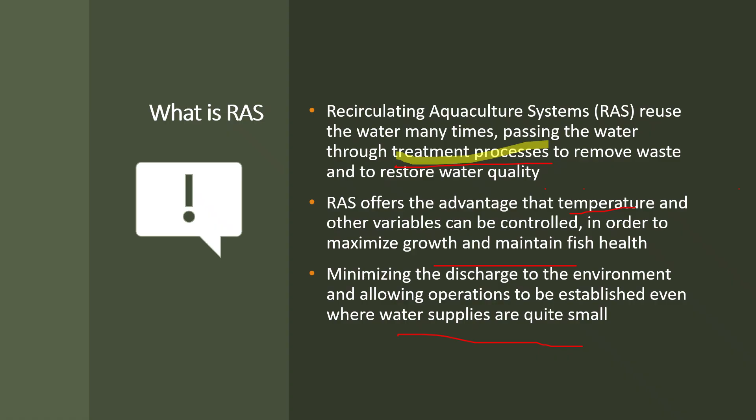We have different degrees of this water circulation. Sometimes we are getting 100% of water through the pump, sometimes less percentages. It highly depends on our activities, our scale, and other factors.

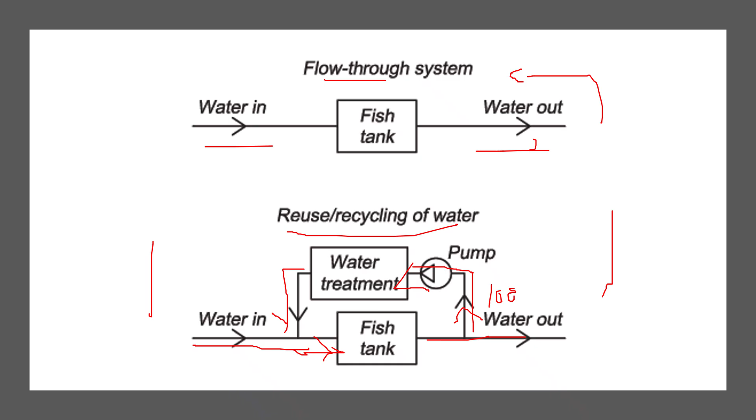So reuse, recycling, or water recirculation - this is the simplest process. We take water from the inlet and it goes through the outlet. While going through the outlet, we pump water again to the water treatment plants, and it comes to the water inlet again. These are the basic steps in this water recirculation aquaculture system, or reusing aquaculture system. This diagram shows the simplified process flow of how this recirculation aquaculture system works.

This is an organized set of complementary processes that allow at least a portion of the water leaving - sometimes not 100% coming to the tank. So a portion of the water is leaving from the tank, and just a portion of the water is coming through the pumps and filtration.

Water goes from the fish culture tank to be reconditioned and then reused, in the same fish culture tanks or other ones. Usually in our farms there is not only one tank or pond - there's a culture system with a number of ponds. Sometimes water goes out from one tank and comes to another tank through the filtration process, so it goes to the same fish culture tank or other fish culture tanks. Don't get the idea that it always comes back to the same tank again.

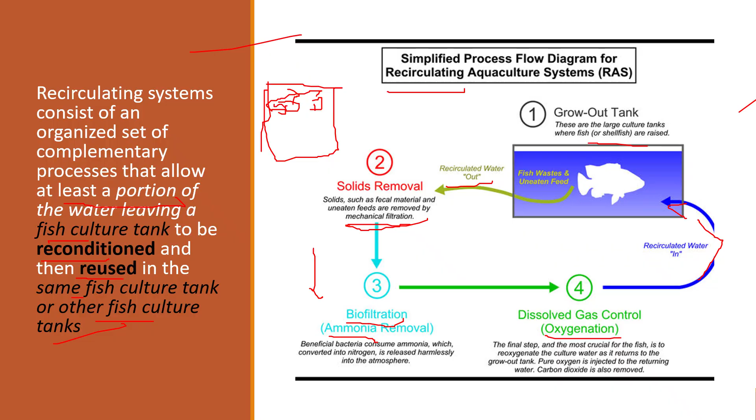Okay, so in a recirculation aquaculture system it is necessary to treat the water continuously. Because if the water is removed from the tank continuously, then we need to treat the water continuously to remove the waste products excreted by the fish and add oxygen to keep the fish alive.

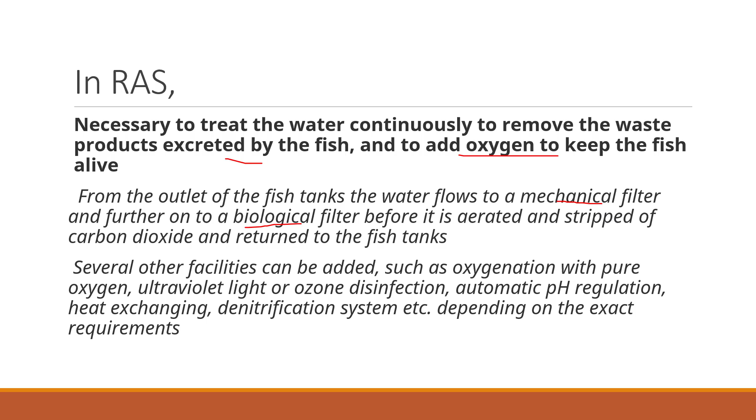So from the outlet of the fish tanks, the water flows to the mechanical filters as we discussed earlier, and further it goes to the biological filters, and before it is returned to the fish tank it is aerated and stripped of carbon dioxide. So several other facilities can be added. These are the basic steps, right?

So we can add several other facilities, such as oxygenation with pure oxygen as we discussed in the previous diagram, or UV lights, ozone disinfection, automatic pH regulation, heat exchanging and denitrification systems. This highly depends on the exact requirement and the scale of our tanks, the quality of the water in the outlet and the quality of the water we need in the inlets.

So now you have a good idea about what recirculation aquaculture systems are and what the components of these systems are, right? Okay, so this is a very good method. You can see sustainability is there. Water is recirculated through the filters and we are reusing the water.

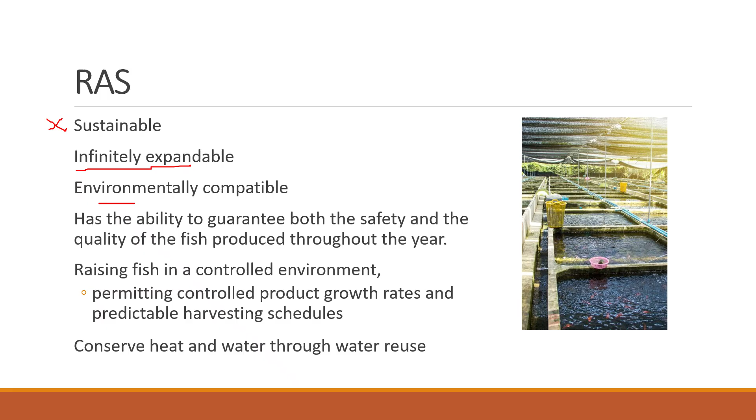Infinite expandability is there. With the improvement of our filtration system, we can expand the system, and this is an environmentally compatible system. It has the ability to guarantee both the safety and the quality of the fish produced throughout the year, if we have the water throughout the year,

because water is recirculated in this system. And also raising fish in a controlled environment permits controlled growth rates and a predictable harvesting schedule. So as we discussed in the previous point, throughout the year we can do these kinds of activities, raising fish in a controlled environment.

This environment is controlled because we are controlling the water quality parameters, so the growth rates and predictable harvesting can be scheduled. It conserves heat and water through water reuse, not like in flow-through systems. So in here we are reusing the water.

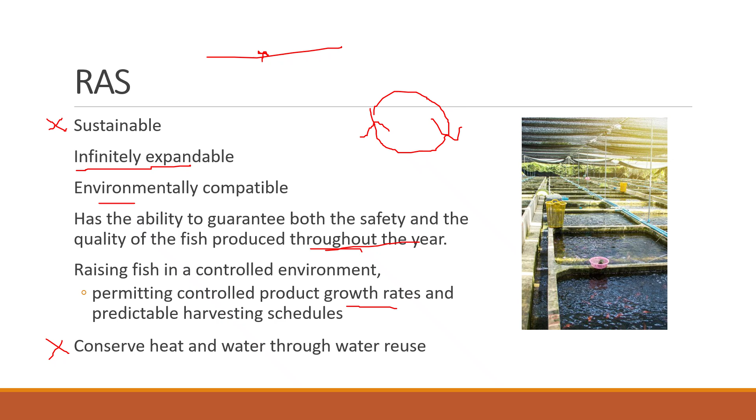Okay, let's move on with the slides. Water treatment processes are used to change the characteristics of water passed through the process, right? Sometimes a water treatment process can change more than one characteristic of the water. For example, water flowing through a trickling biofilter can gain dissolved oxygen and nitrate, while dissolved carbon dioxide and

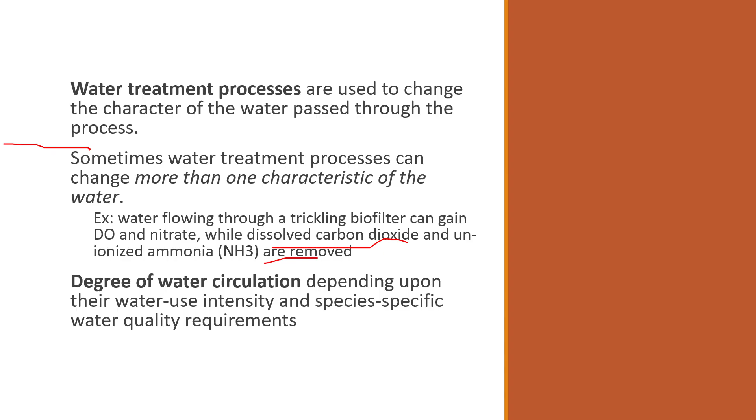un-ionized ammonia are removed. So the degree of water recirculation is the main thing by which we divide how this water recirculation happens in the recirculation system. Reusing, we can say the degree of water circulation, right? It depends upon the water use intensity and species-specific water quality requirements. So basically we are talking about what portion of water is taken to recirculation, by these degrees of water recirculation.

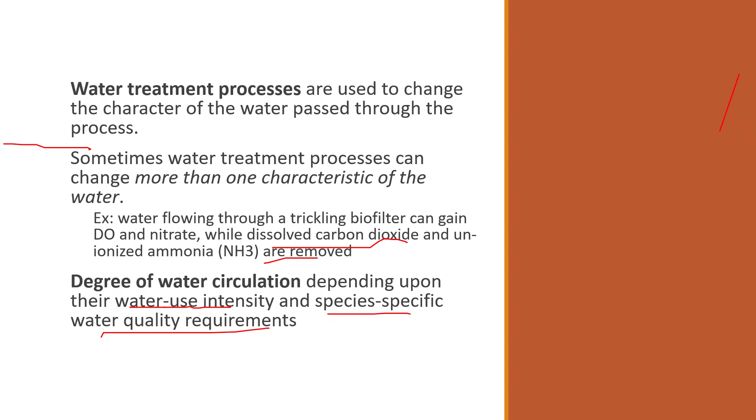Okay, so we are going for this degree of recirculation. This is actually the calculation of the degree. The simple idea is which portion goes through the filtration after the outlet. Not 100%, sometimes a certain percentage goes. So we are using this degree of recirculation to describe the reuse. To describe the reuse or recycling system, several parameters are required. Degree of reuse is one parameter. It gives the percentage of the new incoming water in relation to the total amount of water.

So in this system, as we talked earlier, water comes in, water goes out. When water goes out, some amount of water comes again through this filtration system and comes to the inlet, right? Some amount of water is released, so we need to fill that gap by inputting some percentage of water. That percentage is the new incoming water, Qn, in relation to the total amount of water flowing into the fish tank. So in the degree of reuse we calculate new incoming water as a percentage of the total water going through the fish tank. Okay, I think you got the point, right?

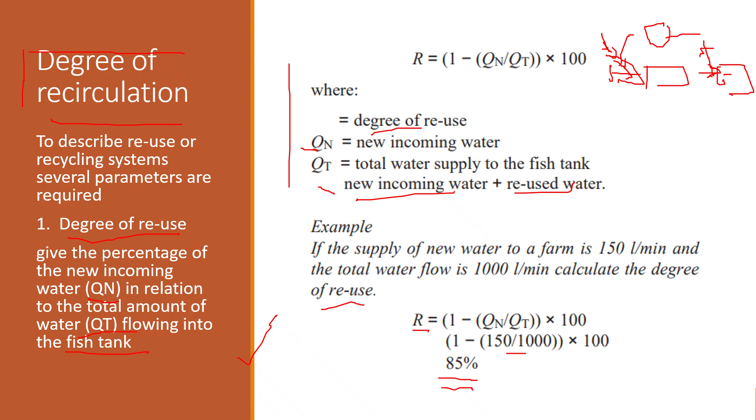But the degree of reuse does not give enough information about the performance of the system. It's not sufficient to describe the recirculation aquaculture system properly. Here we are talking only about water input, which amount of water comes into the system or goes out of the system. But we are not getting the idea of how much new water is added per kilogram of fish, based on the amount of species in our system, meaning the number of kilograms. If we can say for a kilogram of fish this number of liters is input or reused through our system, that will give a proper idea about our recirculation aquaculture system.

So the degree of reuse also gives a good idea. But if you can tell, per kilogram of species, how much water comes through the system and is used, that will give you more understanding about our recirculation aquaculture system, right? Okay, so then we move to the second way of describing our recirculation aquaculture system: the degree of purification. That is, how effectively the cleaning plant in the reuse circuit removes unwanted substances.

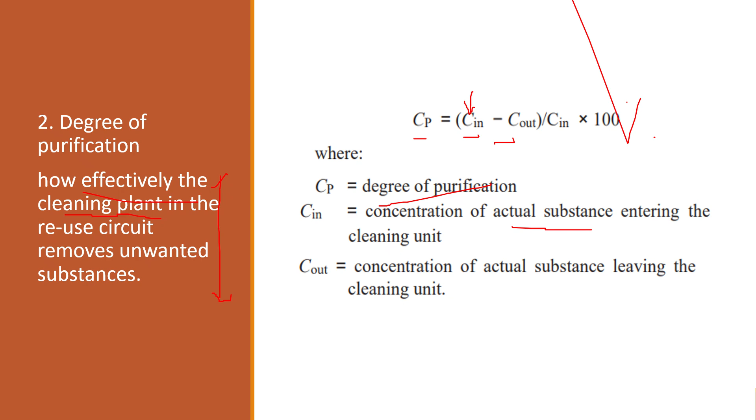So we take the concentration of the inlet materials minus the concentration of the outlet materials, divided by the inlet materials, giving the percentage of the degree of purification. So this is another way that we can tell about our recirculation aquaculture system. So the degree of purification of our recirculation aquaculture system is around 75%. So we can tell like that. Okay.

Okay, so this is another way, the mass flow of the system. So we can say concentration of substances at different stages. In the previous slide we talked about the concentration of the substances in the inlet and the outlet. Then we are dividing and taking the idea about which amount of concentration is removed by our filtration systems. So here we are talking about the concentration of the substances at different stages in the system. Also important to get the clear picture, right?

C equals M divided by Q. So Q is the water flow in liters per minute, M is the mass flow of the substances in milligrams per minute, and C is the concentration of the substances in milligrams per liter, right? Okay, so this is the equation. So in this diagram you can see new water is coming in, so we have Qi, Ci, Mi, and from the production unit it goes out as Qo, Co and Mo at the outlet.

So again this is recirculation and goes through the water treatment unit, and the mass flow of substances, some debris and materials, goes out from the filters, right? Again this comes to the inlet. Okay, so while calculating this kind of mass flow, we can get the idea about concentration in the different stages, right? So using that also we can describe our recirculation aquaculture systems. We have this kind of mass removal, this kind of concentration in the inlets, this kind of concentration when passing through the water treatment units. So we are looking at each of these points to describe our recirculation system, right?

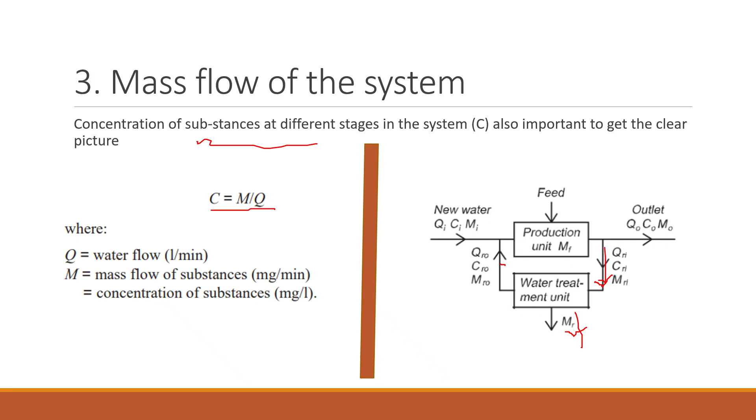Okay, so based on the intensity of the culture we can decide what degree of recirculation we need. So previously we calculated the degree of recirculation and several other calculations, mass flow and the concentrations. All these calculations we discussed give a proper idea of our recirculation system. So our recirculation system needs to be 85% pure water, or 15% new water intake comes to the system, likewise. So we get the proper idea about what kind of system we need. We discussed the previous three calculations, right?

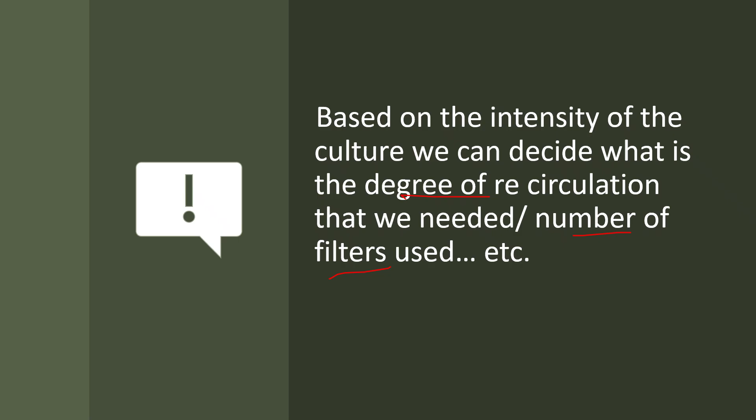So based on those things, based on the intensity of our culture system, we can decide which degree of recirculation we need. It's based on our culture species, our production, stocking densities, and especially it all comes down to intensity. So if we are doing intensive or semi-intensive farming, then we can think about the number of filters we need to use, or the degree of recirculation we need to deal with, right? Okay.

Okay, so these are diagrams of plants suitable for different degrees of water recirculation, as we discussed earlier. So we can see this degree of water recirculation. In here, no reuse: aeration, oxygenation, or the fish tanks, water comes from the inlet and goes from the outlet. And in the lowest degree of recirculation, only aeration and oxygenation is there.

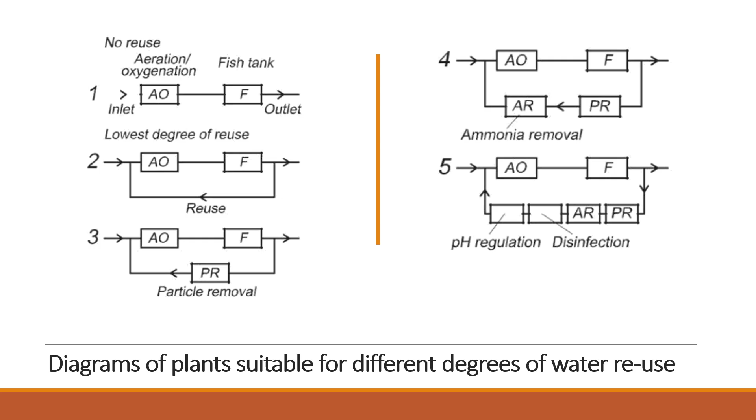Okay, so in here particle removal is there, like solid removal. In here ammonia removal is there, and here pH regulation, disinfection, all the aeration and oxygenation is there, and the particle removal is there, ammonia removal is there. So this is highly dependent on our practices, the intensity of our farming. So we can decide which scale of filtration system we need for our water reuse or recirculating aquaculture system, right?

Okay, so recirculating aquaculture systems actually call for new skills in our aquaculture sector. Earlier, in aquaculture everyone could do seed production and put fish in some open area in the water, or a simple cage, and do the practice. Still they can practice this kind of culture. But if you need to earn more profit or maximize your scale of business, you need to move to recirculating aquaculture systems, meaning the advanced systems.

So using new water is minimal; you are using the same water recirculating through the systems, right? But to do these things, you need knowledge about recirculating aquaculture systems. So recirculation is not for everyone. It requires knowledge, good husbandry and persistence. Shifting from traditional fish farming into recirculation does make many things easier. However, at the same time it requires new and greater skills and knowledge, right?

So then we are going to talk about the components of recirculating aquaculture systems. Definitely now you know the components. There's a fish tank, water inlet, outlet, pumps, the components of the filtration systems and solid removal filtration, oxygenation, aeration, right? So the RAS components: fish tanks or units for the aquaculture species, the water treatment system, pumps to transport the water around the system, and other accessories like UV filters.

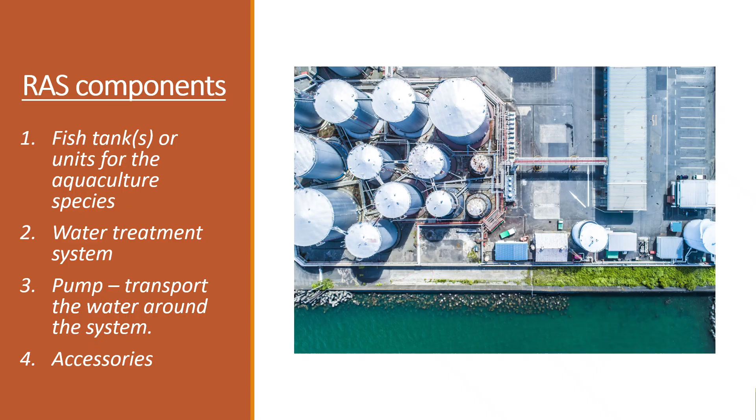Okay, as for tanks, I'm not going to talk much about them because in most subjects on advanced techniques, cage culture, pond construction or tank construction, we talk about the shapes of these cages and tanks, and you know the basics of tanks. There are several shapes and several materials we use, the parameters to consider when selecting the material, and its durability. So I'll go through quickly.

Tank shape and size are adapted to the desired fish species and size. As materials, fiberglass, steel, concrete, plastic, glass, and others with liners can be used, and non-toxic material is needed. Durability is a high concern. Good hydraulic characteristics need to be present, to promote mixing and solid removal. Tanks can be characterized by the diameter to depth ratio. This ratio should be greater than 3, less than 10, and preferably less than 5.

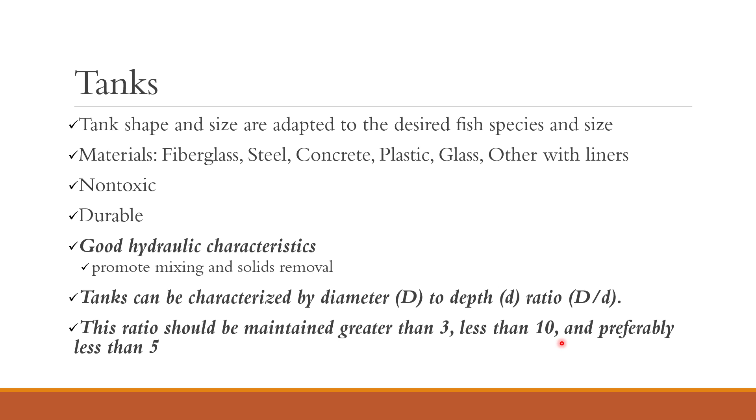So when it comes to tanks, outlets must be constructed for optimal removal of waste particles and fitted with screens with suitable mesh sizes. So when water goes through outlets, we can have solid removal nets. And tanks can be fitted with water level alarms, oxygen probes for oxygen control, and alarms and emergency oxygen diffusion. Water level alarms alert us if the water level exceeds or drops below set levels.

Even nowadays we can use several sensors that simply send messages to our mobile phone, through mobile applications. So we can use oxygen probes. There are a number of sensors, DO sensors, and we can use these in these cases.

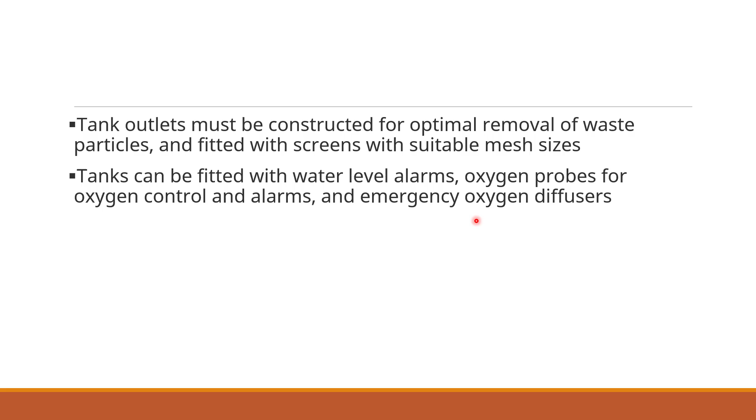Yes, okay, so that's about the tanks. And one of the most important rules for this recirculation aquaculture system is that solids need to be removed from the tank as quickly and efficiently as possible to reduce the solid impact on the water quality. So if the solids are present more time in the water, then the water quality is damaged more. So then we need to deal more with filtration, aeration and oxygenation.

So okay, the major thing is the solids need to be removed from the tank very quickly and efficiently. And using this range of depth to diameter ratio will minimize the problems of solid settling, right? So that's why in the previous slide we defined the ratio as less than 5, which may be very preferable, right?

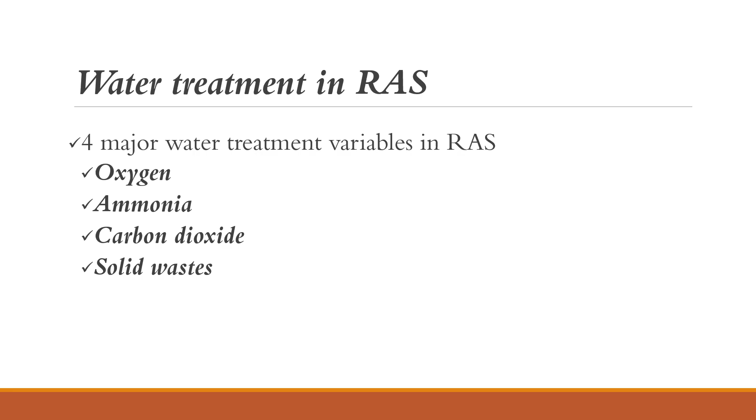Okay, so water treatment in recirculation aquaculture systems: there are four major water treatment variables. Oxygen, ammonia, carbon dioxide, and solid waste. So those are the major types of waste treatments we are going to deal with in these recirculation aquaculture systems, right? So RAS generally require at least one or more of the following treatment processes. So here we are going to talk about the treatment processes.

So a sedimentation unit should be there, and granular filters or mechanical filters to reduce the particulate solids. So the solid removal part is there, and we need biological filters to decrease the dissolved waste in the outlet, and aerators to add dissolved oxygen and decrease dissolved carbon dioxide or nitrogen gas to levels closer to atmospheric saturation, right?

And also oxygenation units to increase the dissolved oxygen concentrations above atmospheric saturation levels, right? Then advanced oxidation units, meaning UV filters or ozone units, to disinfect, oxidize organic waste and nitrites, or supplement the effectiveness of the other waste treatment units. Finally, we can deal with pH controllers to add alkaline chemicals for maintaining water buffering, keeping pH levels stable and reducing dissolved carbon dioxide levels.

And also heaters or chillers to regulate water temperature. So we are putting sensors here, temperature sensors, DO sensors. In your mini project subject, some groups are dealing with these kinds of automated systems. So likewise we can use these kinds of sensors for these systems. Actually they are using these sensors nowadays. It simply gives us the updated real-time values of these things.

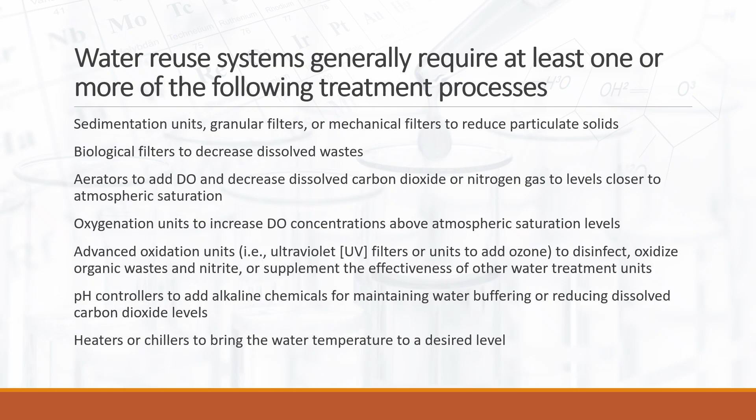So in our system sometimes everything is present, sometimes only some of these parts. Generally these are the required things for the treatment process, right? Okay, so finally, these are the basic steps. In the fish tank, feed and the species are there, and inlet water comes in. The outlet water goes to the mechanical filters. Then denitrification happens, wastewater goes out, and the water comes back to the system, and from the pumps it goes to the biological filters and back to the fish tank.

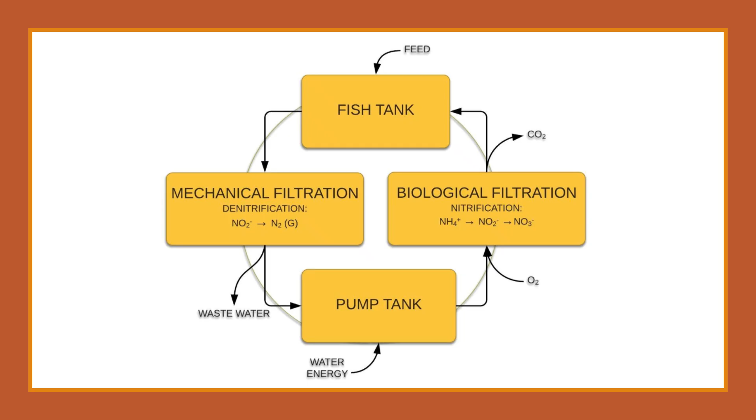So that's all about these recirculation aquaculture systems, and you have one assignment. I'll upload this assignment and what you need to do to the VLE, so then you can have a better idea with this assignment. You need to write a detailed account about this recirculation aquaculture system. Here we have discussed how to describe recirculation aquaculture systems and what the components of recirculation aquaculture systems are.

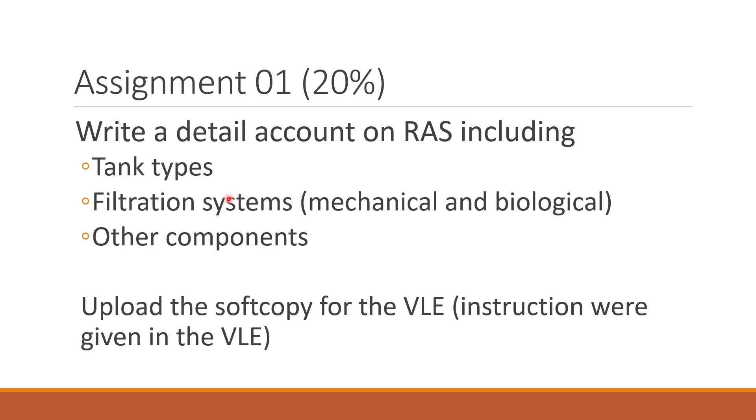For the filtration systems, what are the types of filters we are using? As for pumps, what pumps are we using? So you need to search and write a detailed account with references. I'll upload this assignment to the VLE. Okay, so that's all about recirculation aquaculture systems. I think you got a proper idea with this presentation.